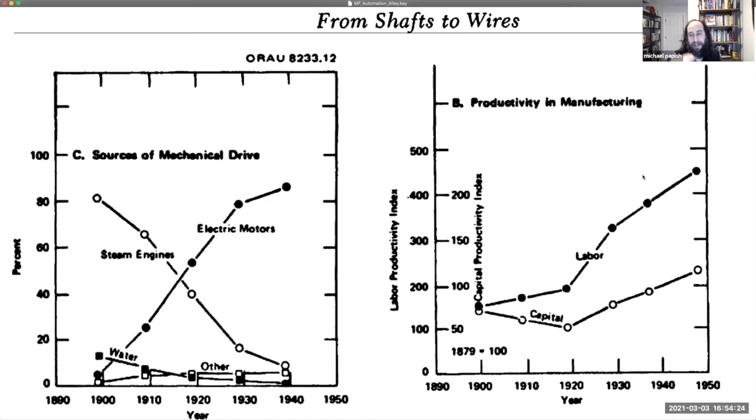It's kind of interesting to note that ultimately these gains in productivity, while the investments going on in factories are really happening with capital equipment, it's ultimately the human labor and productivity that generates the giant leaps and gains we see in the world. So we're changing the factory and the means of production, but with the goal of making the workers more productive and capable of building things faster and building more things.

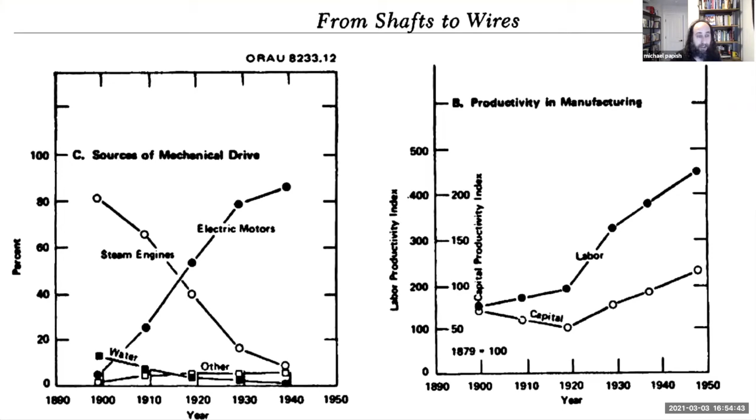So what is actually going on in these 40 years? It's really a process of having to learn how to think differently, of overcoming constraints that sometimes you forget even exist, to understand and unlock the full potential of a new technology.

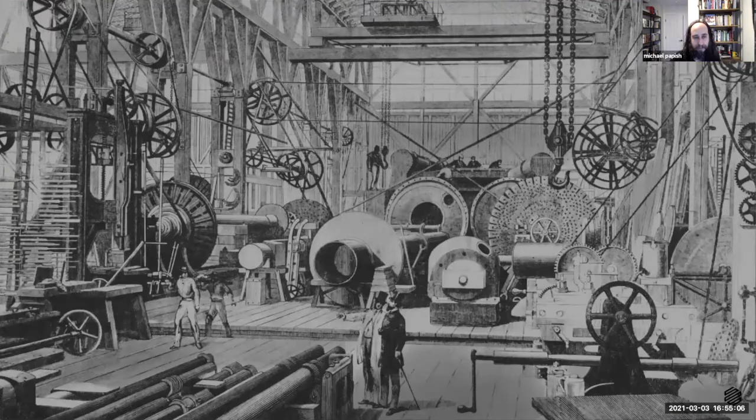So if you look at how a steam-powered factory might operate, and we have a picture of one right here, you'll see it's ultimately a pretty difficult place to work. Steam-powered factories were loud, noisy, dirty, really hard places to work.

Every single piece of equipment in the factory had to be attached to one of these long-running shafts that ran up and down the full length. What this meant was that you organized the factory not around what was best for the people and what they were trying to build, but around the power source.

Things were very manual in these factories. On the left, there's two guys carrying something around - kind of the modern equivalent of a forklift. In the front, we have these two guys in top hats. I like to think of this as kind of the CFO. Even back in the good old days, you still had a CFO walking around making sure this thing was generating profit and working well.

But really, this factory was highly inefficient. If you wanted to run one part of the factory, you had to run the whole thing. There's no way to separate the power source from the cells inside the factory, and really there's a lot of wasted energy.

So ultimately, as we imagine how to apply the lessons of the past to the world we live in today, we can find many parallels in the transition from steam-powered factories to electrical factories, and the ways people had to learn how to harness the technology differently. When we talk about this term Industry 4.0, or a revolution in how we make things, ultimately it's going to be about changing the culture of how people think about manufacturing and building in order to really reap the gains these revolutions promise us.

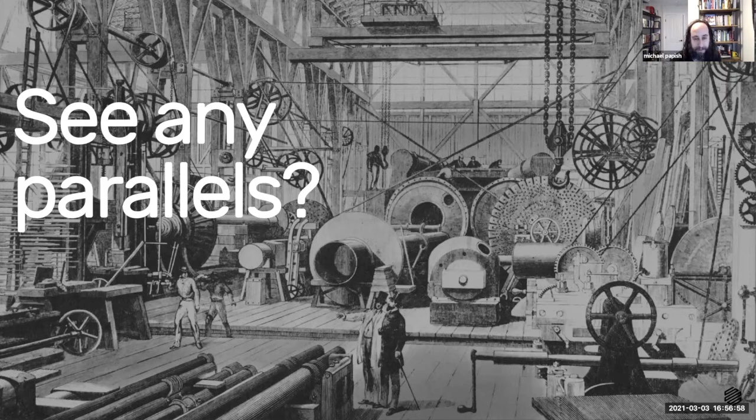So this may beg the question, if we're setting out to fundamentally change the way manufacturing works, why? Why does manufacturing need to transform? As a consumer today, I can go on Amazon and almost anything I can imagine, I can get shipped to me in 2 days.

For those of you in the audience who are manufacturers, I think you know much more about all the constraints and limitations. But even here, sometimes it's hard to reimagine the full potential of what we could do if only we could remove the constraints of traditional and conventional manufacturing to allow us to really build anything we imagine.

And so ultimately, we live in a very dynamic world. What I mean by that is, as a manufacturer nowadays, it's not necessarily the case that by just being able to produce a high volume of goods at a low price that you will win. In reality, there are many other things you have to be able to do to succeed as a manufacturer today. Now, before the pandemic, these were still the case.

After the pandemic, I think it's pretty starkly shown why many of our strategies for optimizing supply chains are not very resilient or adaptive to our modern and dynamic world. Certainly during the pandemic, we witnessed supply chain shocks.

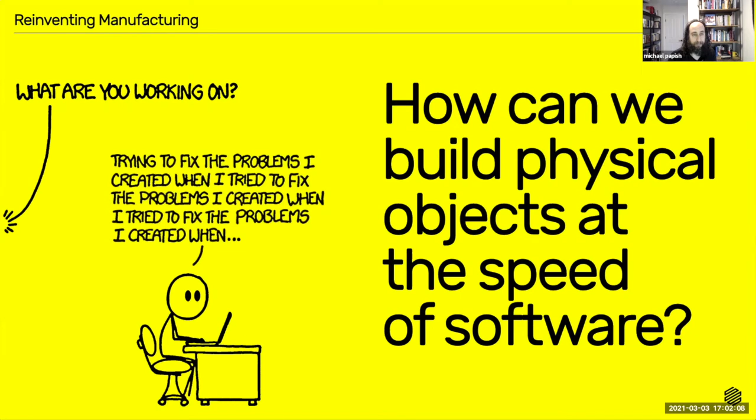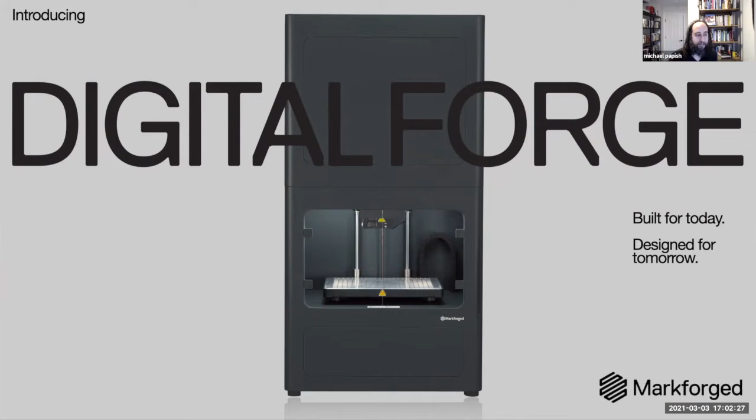So in order to do that, what do we actually make here at Markforged? Yes, we make 3D printers, but it's actually a lot more than that. Ultimately, we make the Digital Forge, and the Digital Forge is a platform. It's comprised of precise and reliable 3D printers, materials spanning the range from composites and reinforced carbon fiber and continuous fibers all the way to metal, and cloud software that connects it all together. Ultimately, it's the fact that this is a uniform and integrated platform that will scale over time with a single workflow that we believe best meets the needs of manufacturers.

Ultimately, we believe that both manufacturers and Markforged are on a journey to create better and better additive solutions. We think that by provisioning a platform that our customers invest in and begin to use, we can take that platform and scale its capability set over time, allowing us to bring new innovations and capabilities while supporting the journey of our customers as they adopt additive across their entire organization. So really it's the idea of offering a solution that scales over time that will allow us to meet the future needs of manufacturing.

So the Digital Forge is the name of our platform. We built it to work today and deliver real value, but we designed it to scale into the future and to meet your needs where you're going.

So what is it that we actually provide here at Markforged? We provide real and tangible ROI today so you can unleash the full potential of your employees. What we mean is our solution and platform can solve real applications today, earning back ROI and delivering real value immediately. It's not just for R&D or prototyping—you can place this into production and yield real results immediately.

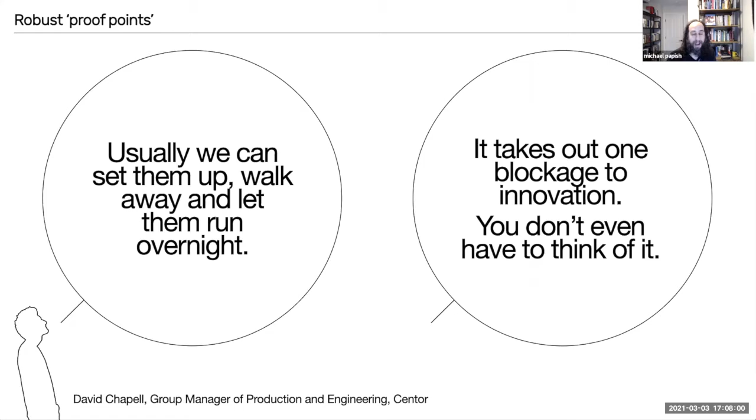When we think about being robust, it's this notion that you can set the system up, walk away, let it run overnight, and it prints exactly what you expect. You don't have to futz with it to tune it just right—we take care of all that so you can rely on this tool for industrial use cases. When we think about being simple, a lot of this is baked into the user experience.

Having one single optimized workflow across all the materials and printers that we provide, having the ability to access this anywhere in the world across all your facilities, and multiple users, just like the way that your company actually runs.

One of my favorite features is the simple 5-star print rating. When you complete a print, a dialog box pops up on the printer and asks how good was the print, 1 to 5 stars, just like giving a Yelp review. It's that easy to give us feedback, and that data comes back into the system. Because it's smart, we use that data to make the printers print better the next time.

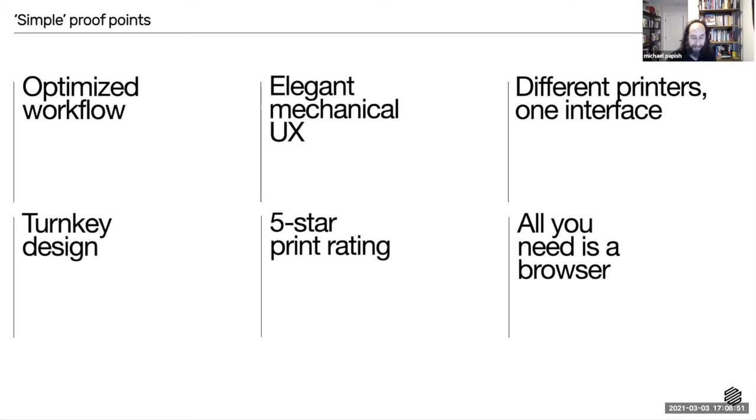There are also a bunch of other smart features built into the system. For example, our X7 printer has the ability to automatically calibrate itself. There are sensors on the printer that over time we will be using more and more to gather data in real time about the prints and then optimize and make it better, essentially closing the loop on manufacturing.

We have the ability to monitor your material usage in real time. There are APIs available if you need telemetry data. We provide live build monitoring so you can get actual pictures of your print being made.

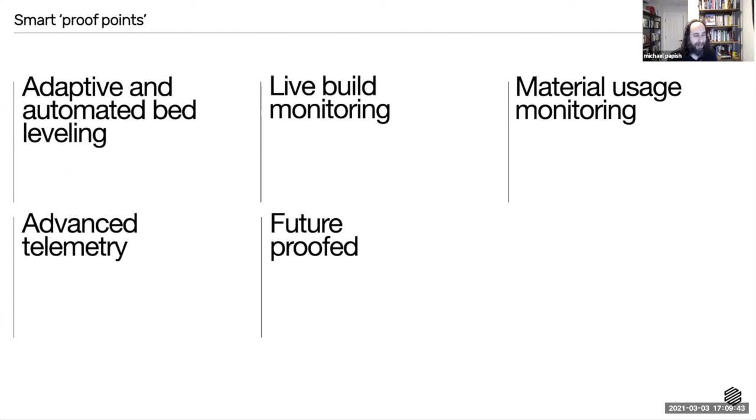And ultimately, the system is future-proofed. A lot of capital equipment depreciates in value over time. We always say that with Markforged, your printer is at its worst on the first day you install it, because the software that it comes with keeps making it better and better over time.

And then finally, it's empowering, and we hear this from our customers. These are some quotes from Caldwell Manufacturing. They're a window and door manufacturer in New York that is 130 years old. I actually just found out recently that all the windows on the Statue of Liberty were manufactured by Caldwell when it was first installed, and they still maintain those windows.

They use Markforged technology to really change the curve on manufacturing, and now solve problems that would have taken them weeks with traditional manufacturing technology in mere days using our printers. And this quote on the right from Eric, the CEO of Caldwell, says it has actually increased engagement and reduced turnover. It's actually part of their culture now.

And this, I think, is really powerful. A lot of times, new automated technology makes us fearful that it might displace jobs. But in reality, we see customers using our technology to make people more productive and more engaged at work, because they're solving more interesting problems and leaving the boring stuff to the printer so they don't have to deal with it as much.

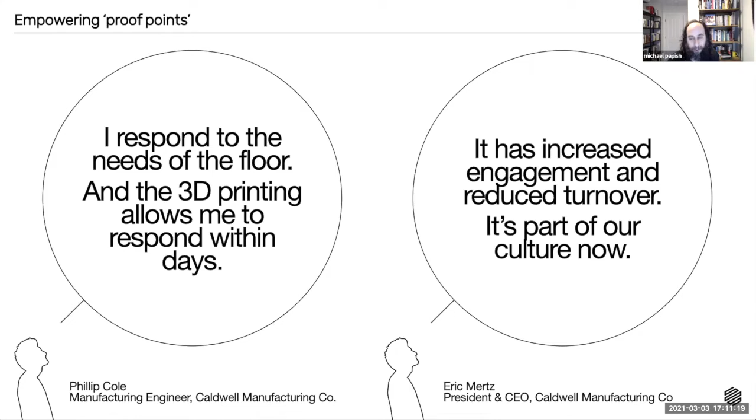And this is exactly what we want to hear, this idea that what we're actually doing isn't just selling printers. It's actually changing the culture of manufacturers, which is ultimately how we get to things like industrial revolution. So again, if we're looking at the pillars, robust, simple, smart, and empowering, this is the formula that we use to deliver success.

Now, we believe that the world of additive is going big places. So you may have seen recently some news from us. Our company will be going public over the next couple of months, and we're really gearing up for the next phase of our growth. The thesis behind this is that additive technology is moving away from R&D and prototyping, really crossing the chasm into real production use cases.

And these are the use cases that we are actually delivering today here at Markforged. It's not just about the future. We're solving real tangible problems today, and we see a widening set of opportunity going forward.

Looking out into the future, this industry of additive manufacturing has actually grown quite a bit over the last 10 years, starting at around $2 billion a year in 2012, growing to an expected nearly $18 billion in 2021. A substantially higher growth rate is expected over the next decade, bringing this industry over $100 billion by 2029.

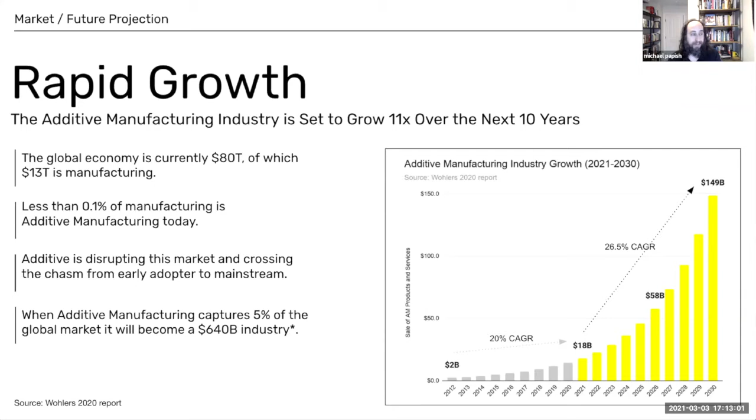And it's not surprising. Manufacturing is a giant global industry. Today, the entire global economy is about $80 trillion, and manufacturing is $13 trillion of that. Today, less than 0.1% of manufacturing is powered by additive technology. We believe that over time, as we're able to scale the capability sets, more and more manufacturing can be done via additive, and that will really usher in these changes that we're talking about.

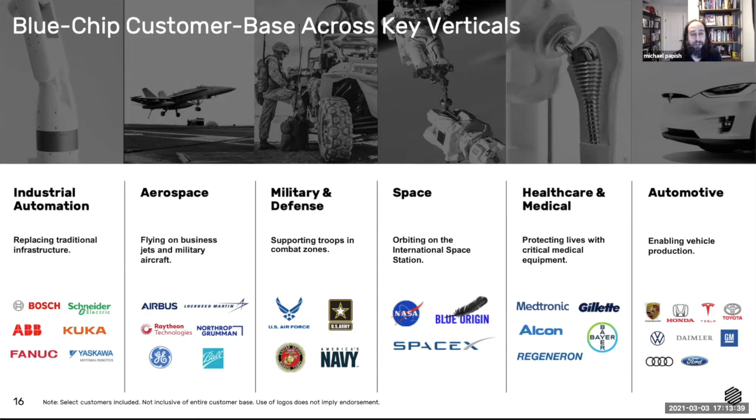Today here at Markforged, we're delivering real value across all the leading edge industries that are taking humanity to our next level, from industrial automation, changing the pace of factories, aerospace and space exploration, military and defense, healthcare and automotive. At Markforged, we're really lucky to be working with the top customers in each of these segments, delivering game-changing technology that's going to allow us and the world around us to really change each of these industry verticals over the next several years.

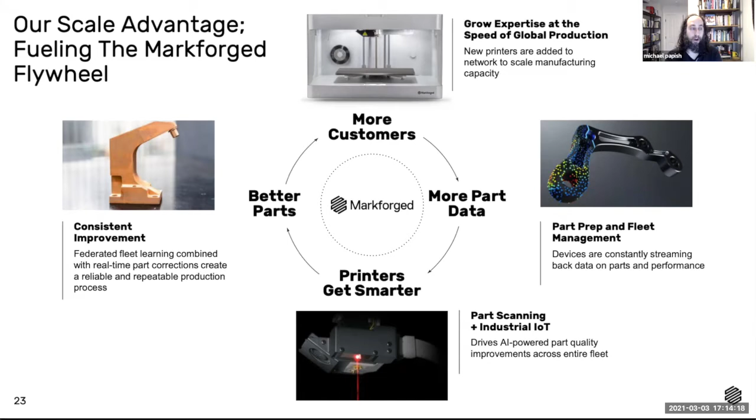The way this is done for Markforged is that the more our printers are used, the smarter the system gets and the better the parts become. It's this really great flywheel. As we learn more about how different parts work on the printer, using the sensors built in that are able to scan these parts, we can deliver via federated fleet learning consistent improvements via over-the-air software that continually make the system better and therefore create more interest in printing more parts, which drives this wheel around.

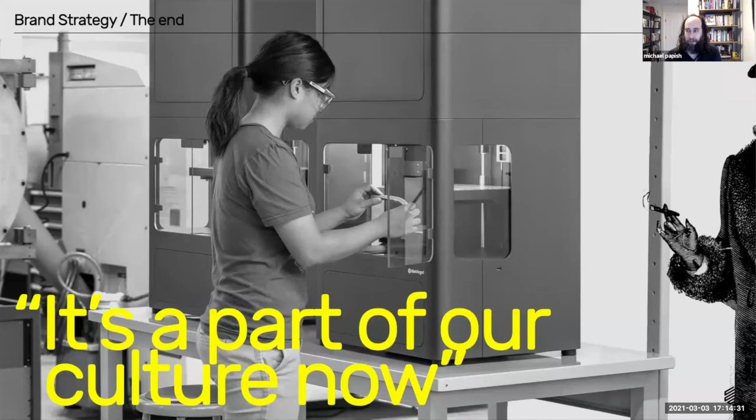Ultimately, what we want to hear, it's a part of our culture now. And here is the CFO. He has returned from the beginning part of the presentation. He's still looking over people's shoulders, but he's pretty happy at how these printers are working. They're delivering some really great value. He sees lots of opportunities. So he's exited stage right, and we can get back to the actual work of running manufacturing operations.

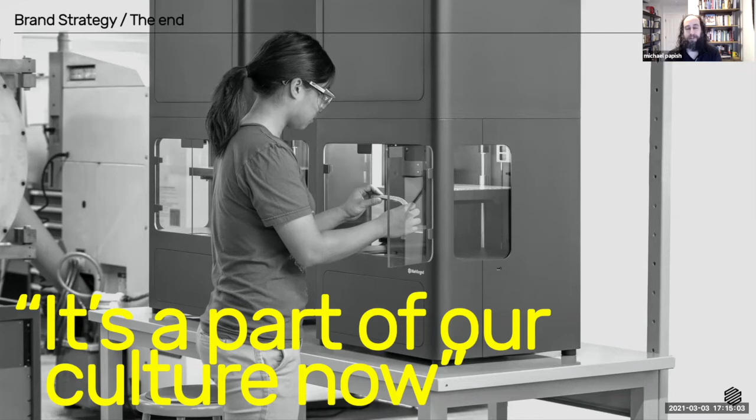Good morning, and thank you, Michael Papish, for kicking off today's Tech Takeover session with the story of us. At Markforged, we are reinventing manufacturing today so that our customers can build anything they imagine tomorrow. This is founded upon the belief that if we can bring the power of agile connected software to the world of physical manufacturing, we can create one of those productivity leaps that really truly ushers in a new age of manufacturing.

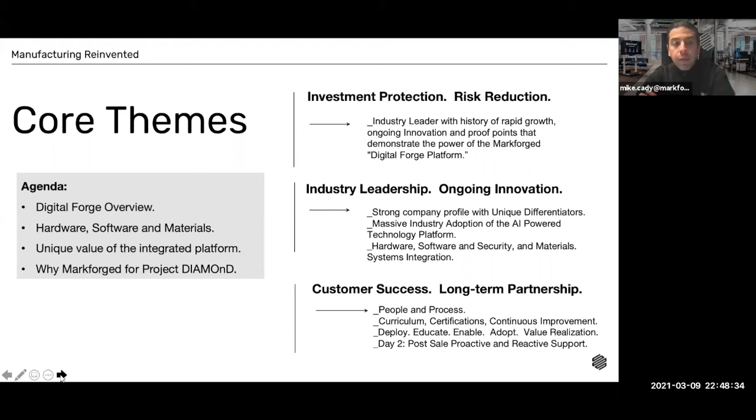Over the next 30 minutes, we're going to dive into some of the details of what we call the digital forge. We'll spend time reviewing our hardware, materials, and software portfolio, highlighting the unique value our integrated platform delivers to define why Markforged is a great fit for Project DIAMOnD.

So the Markforged industrial 3D printing platform is purpose-built to be smart, robust, simple, and empowering. We do this by bringing the power of agile software engineering to the world of industrial manufacturing. We call this the digital forge.

In 2013, we invented the digital forge, which was the world's first and only high-strength, low-cost, smart additive platform. Today, we have the world's largest and most secure fleet of connected industrial 3D printers, with about 12,000 manufacturing customers printing more than 10 million parts. We are collecting massive amounts of data that will be used to power the next generation of digital factories.

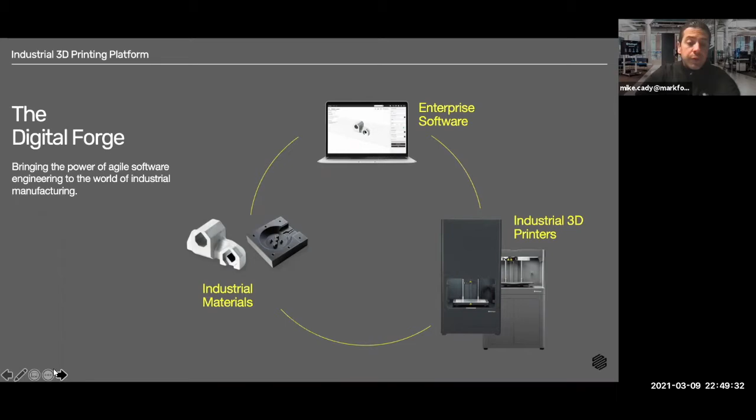At Markforged, we design intelligent 3D printing systems that continuously improve and transform the way you manufacture. So with software at the core, the digital forge provides a single user experience across the entire Markforged technology stack. We offer a full range of printers in the portfolio, from plastics to composites to metal. And we have purpose-built materials that are engineered to deliver superior strength, accuracy, and surface finish.

All of these components are built and designed from the ground up to deliver a wide range of functionality in a reliable manner. By controlling all of these variables associated with the 3D print, we, Markforged, own the entire value chain and can ensure successful outcomes for our customers.

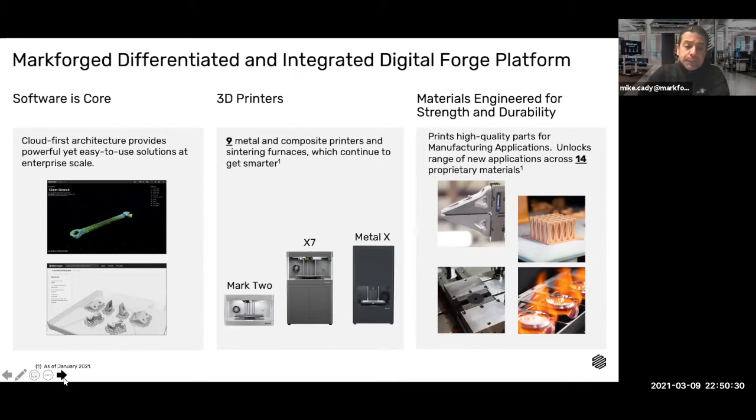So in the context of Project DIAMOnD, in less than 60 days, we implemented the DIAMOnD Network, supporting approximately 300 businesses in Oakland and Macomb counties that enables an agile print-on-demand infrastructure for PPE in emergency response situations. In addition, this network will serve as the foundation to support future diversification via a digital e-commerce marketplace for B2B commercialization.

The Digital Forge itself offers a simple, smart, scalable additive manufacturing platform built and designed on this secure cloud-connected architecture. So the Digital Forge enables machine learning that makes the platform better with each part it prints.

The Digital Forge printer functionality and capability is constantly enhanced via ongoing over-the-air updates, which provide software feature releases delivered through the Markforged cloud architecture. There's no network, no compute, no storage required, and little or no IT operational burden to implement and support this application. This provides organizations with a true borderless experience for global connectivity and collaboration, as well as maximum visibility within your organization. It becomes very easy to manage printers across multiple geographies.

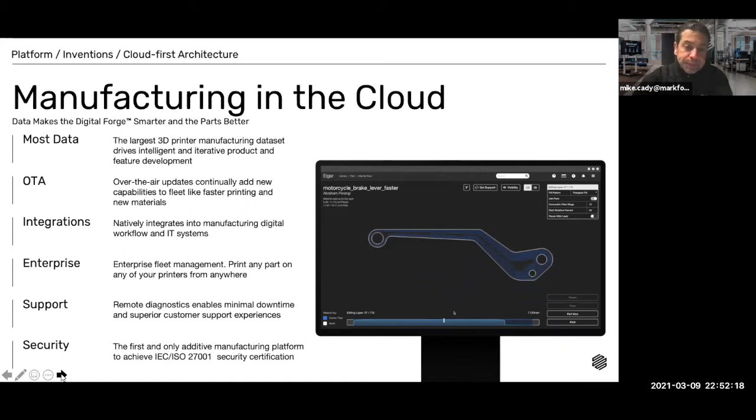Markforged is transforming manufacturing today, leveraging a broad portfolio of 3D plastic, composite, and metal printers capable of producing parts tough enough for the factory floor. The DIAMOnD Network has deployed and adopted all of the products that you see here on the screen.

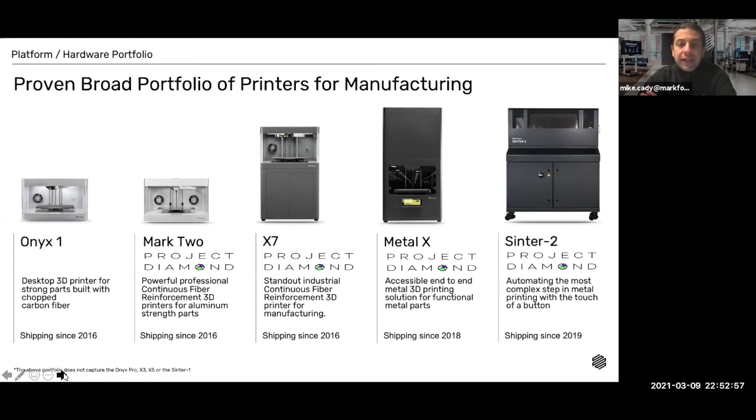Everything from our Professional Series Mark Two continuous fiber desktop product to the Industrial Composite X7 to our Metal X Sinter 2 print farms. In addition to the hardware portfolio, the Digital Forge platform offers a wide range of materials, unlocking a broad set of applications for our customers.

Markforged is the only company who offers a portfolio that spans plastics to composites to metal via a single user experience across the entire portfolio. And that enables our customer base to scale quickly and reduce any ongoing operational burden associated with this type of technology.

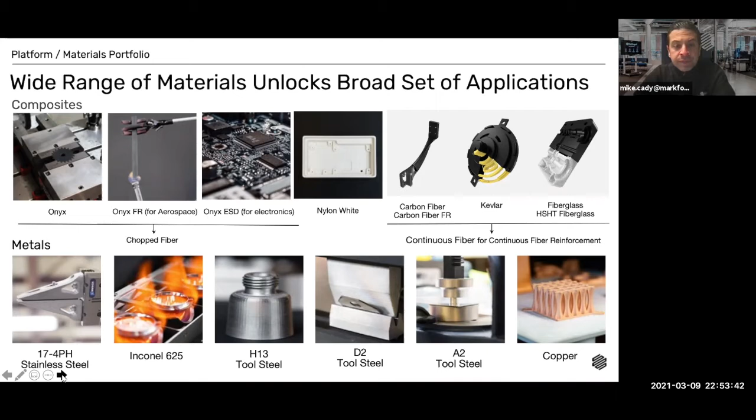Cloud computing is only possible when we prioritize the security of our data. So we believe that every product and engineering decision that we make at Markforged has a security component to it, and our customers and their data are at the center of all of these decisions. So a couple things to note.

Markforged offers the most secure additive platform in the world. We believe we're the only platform with ISO 27001 certification, across organizational security, customer data, software and supplier relationships. And that's further underscored by the fact that Markforged is the only additive manufacturing company in the DoD manufacturing consortium. Frankly, we're committed to being extremely transparent about our security practices, and we're continuously improving our security program to ensure we're exceeding security standards of our customers.

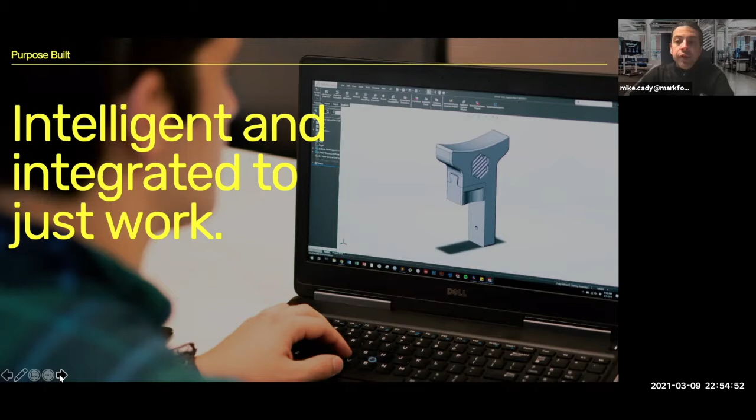In sum, the Digital Forge is an extremely scalable, easy to use, purpose-built system that works securely and reliably. Okay, so now that you have a good understanding of the Digital Forge, let's talk software.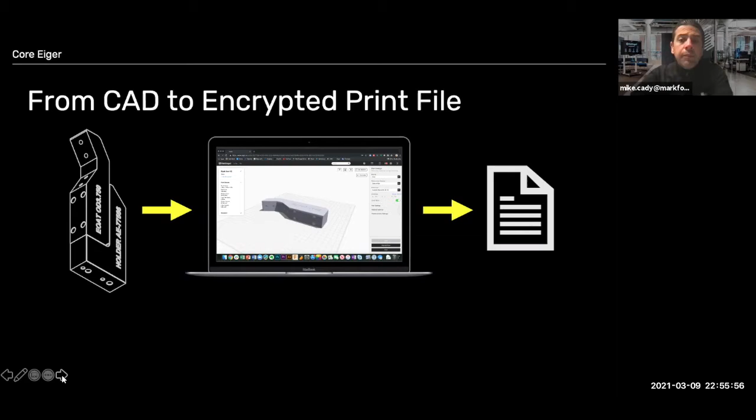Eiger also provides a streamlined way to go from design file to perfect part with our best-in-class Markforged slicer. It's real simple: you import the STL, you set your print parameters, save your part, and your part saves as a MFP file that can only be decrypted by the endpoints in our printer portfolio.

To expand a little bit on Eiger, or Core Eiger as we call it, it's a cloud-based application that runs through a Google Chrome web browser. All the technology from Markforged uses Eiger, which means it's the same experience whether you're leveraging our plastic, composite, or metal products. It's one service and support model for your entire fleet, and it's one hand to shake.

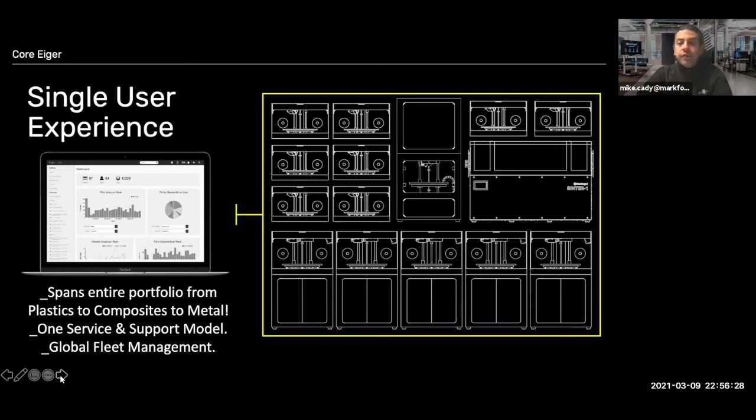This system has been engineered and designed to be simple, scalable, and easy to use. The cloud solution architecture is built on a best-in-class security program, as we mentioned. The Digital Forge is an end-to-end solution for deploying digital factories in any industry. One platform, one experience, one solution, one hand to shake.

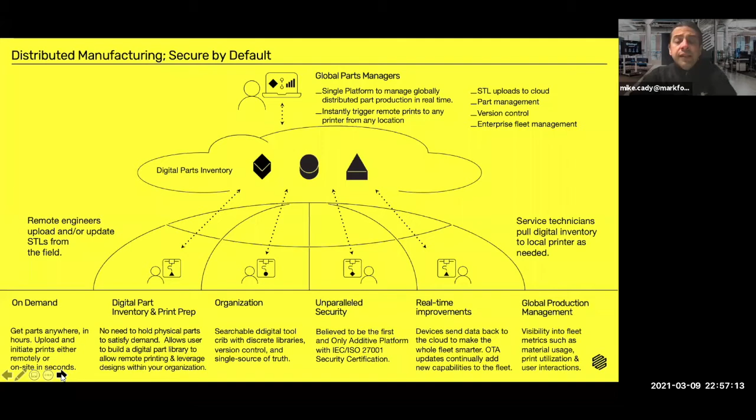We have the ability to trigger remote prints to any printer from any location in the Eiger org. We can manage the entire fleet via a single pane of glass. You have access to a single source of truth, digital inventory, and print on demand capabilities. And lastly, seamless deployment of new features and capabilities via OTA, or over-the-air, updates that we mentioned a few moments ago.

A couple areas of additional functionality to call out. These are things our customers really dig about the Core Eiger platform. Prior to printing, Eiger tells you what your cost and lead time is, and the volume and weight in advance of the print. It also allows you to establish preset builds.

So you're not limited to printing the same part. You can print any combination of parts, assuming the build materials and layer heights are the same. You can also save these builds for future reference. We have a lot of customers with multi-part assemblies that they'll save as a build, so you can call those up on demand and print them on demand.

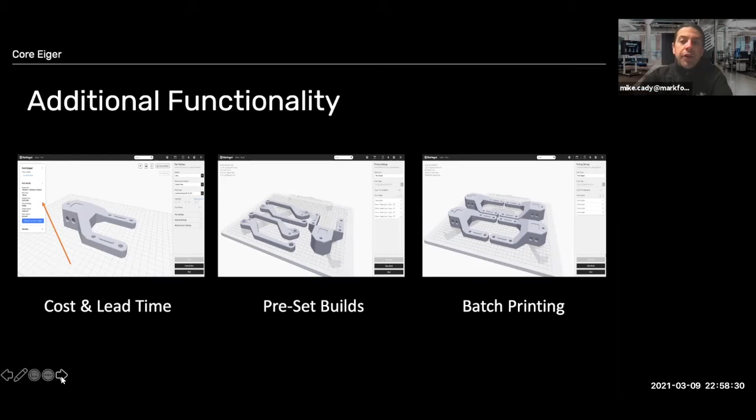And lastly, batch printing. You have the option to do kind of a multi-up print. In this example, you see 4 parts, 4 of the same parts at once. You'll get a summarized version of the build time, cost, and material usage as you make changes to that batch print. This allows the user to optimize based on time and cost metrics if needed.

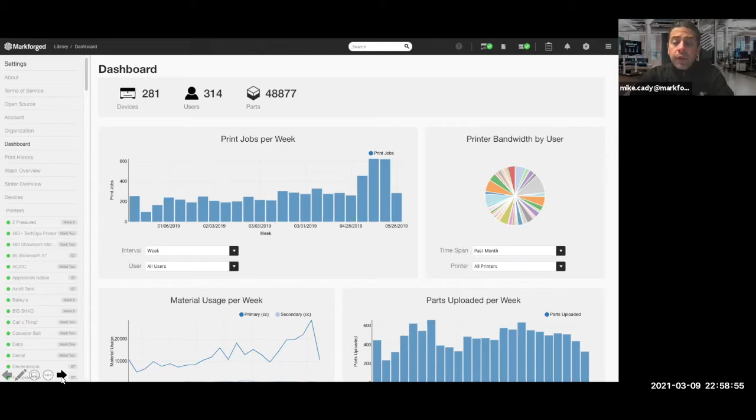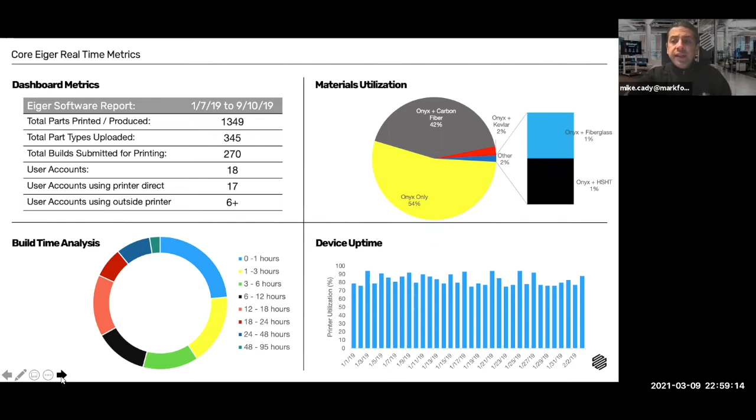With Core Eiger asset monitoring via our integrated dashboard with KPIs, you get global connectivity and full visibility into your Eiger organization, enabling you to easily track usage, utilization, and more from a single platform. Specifically, key real-time metrics are tracked and can be exported to a CSV file, such as devices, users and prints, material utilization, build time analytics, device utilization, and uptime.

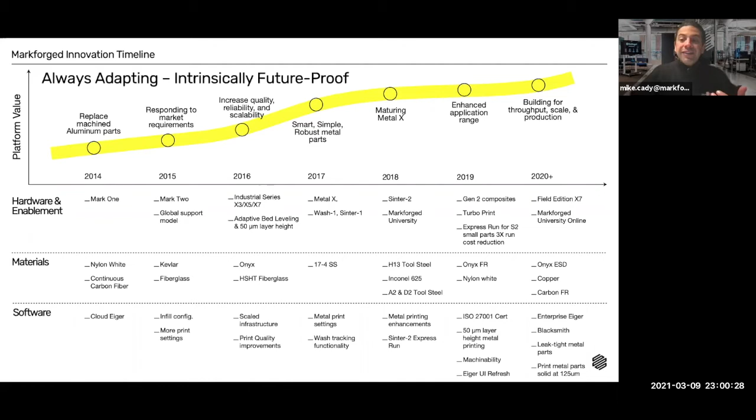The Digital Forge is proud of its long history of innovation centered around market-driven technical development. The core system itself continues to improve over time at no additional cost to the customer. The Digital Forge is always adapting as it continues to learn and grow, delivering more value to our customer base across hardware, materials, and software. Because we're always adapting, we're intrinsically future-proofing our customers' investments in Markforged. Over the years, there are many proof points reinforcing that when customers invest in the Digital Forge platform, the solution is the worst it will ever be in your environment. The system keeps learning and getting smarter over time.

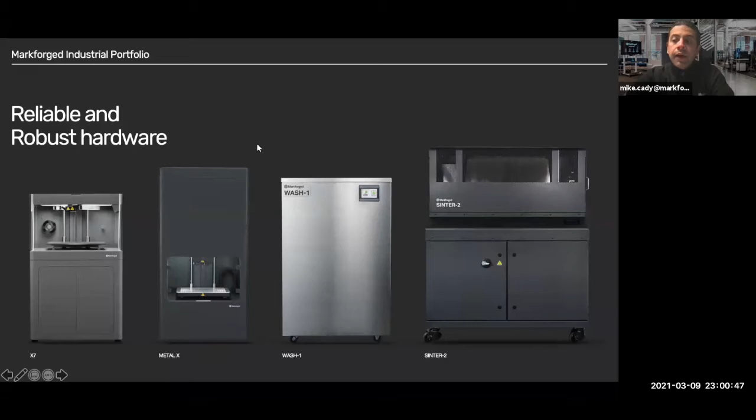Now that you have a baseline understanding of our software, let's talk about hardware. The Markforged industrial portfolio is made up of extremely reliable and robust hardware. We've instrumented the industrial composite platform with a full sensor suite and a 1 micron laser micrometer, which is the driving force behind the industry-leading automation and quality of the platform.

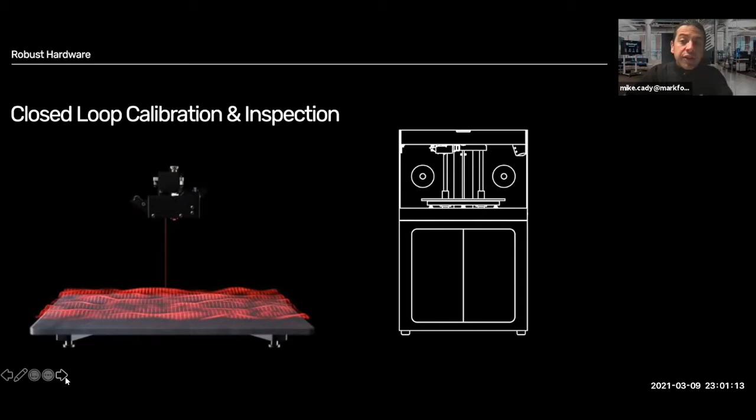What sets the industrial composite platform apart from others is the level of automation incorporated into this product. This automation provides a seamless and reliable customer experience and exceptional accuracy. The platform can routinely print parts with an accuracy of plus or minus 50 microns. That 1 micron laser micrometer on the print head serves a variety of functions, such as adaptive bed leveling, pre-print calibration, and in-process inspection.

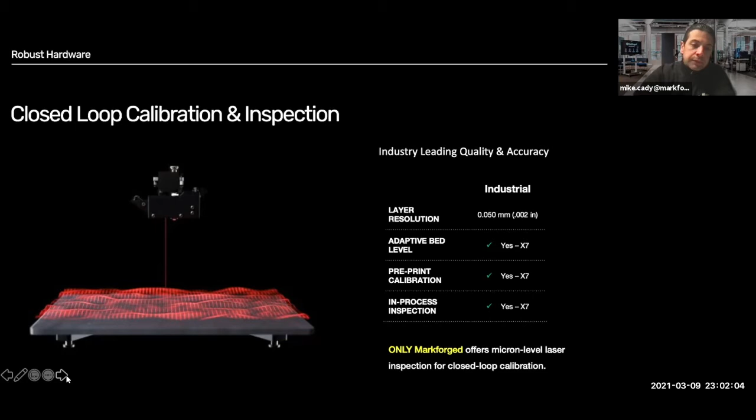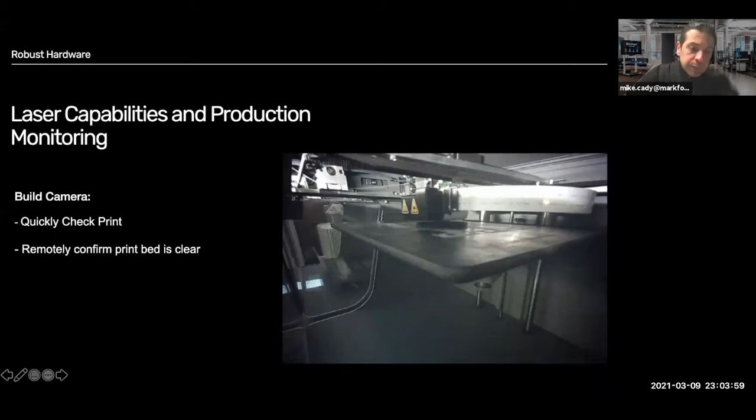These laser and production monitoring capabilities increase overall print reliability and uptime for our customers. The industrial composite flagship product, the Markforged X7, also offers an onboard camera that lets users remotely check in on their prints and even remotely kick off a print. The robust hardware offering also provides best-in-class surface finish with extremely smooth surface quality at high resolutions, setting the industrial composite platform apart from others in the industry.

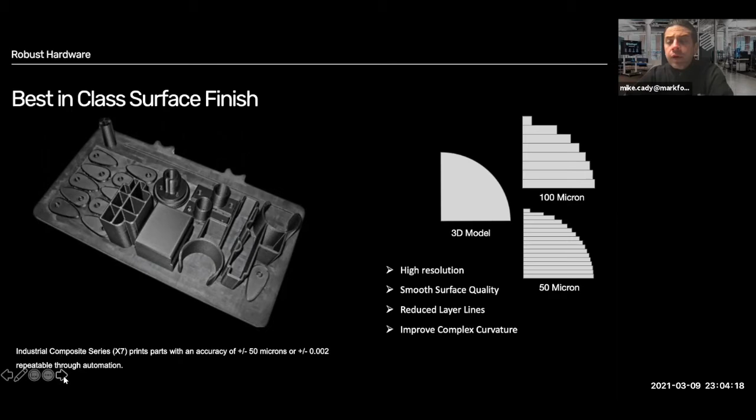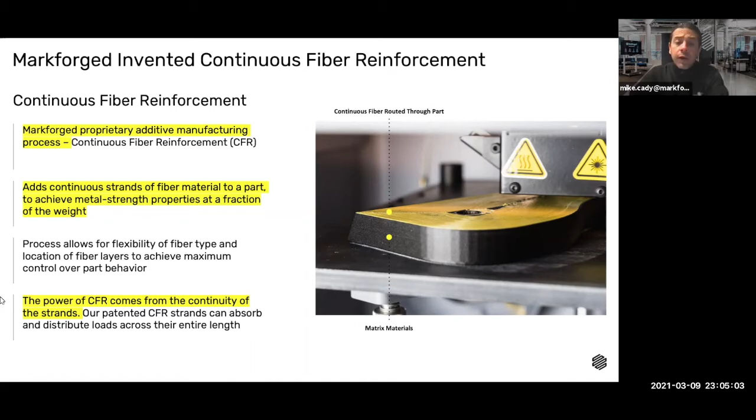With this foundational understanding of the world's first cloud-first software solution for additive manufacturing, and the robust capabilities of our industrial hardware platform, let's build on that knowledge and introduce the world's first continuous fiber reinforcement printing solution. Continuous fiber reinforcement is a unique and patented process from Markforged that unlocks massive potential on the manufacturing floor for our customers. Markforged invented this process, delivering unmatched strength in our industry.

The matrix material we use is called Onyx. Onyx was developed by Markforged, and by definition it's a composite in itself, consisting of a mixture of nylon and chopped short strands of carbon fiber. Interestingly, the chopped carbon fiber was not added for strength, but for stability and printability. The short strand carbon fiber helps prevent drastic changes as the material is heated and cooled, resulting in very beautiful and accurate parts. Onyx by itself is extremely strong — 20% stronger than ABS and about 40% stiffer.

The dramatic increase in strength, though, comes from the addition of continuous fibers to the parts. Markforged technology offers the unique ability to integrate continuous strands of carbon fiber, Kevlar, fiberglass, and high strength, high temperature fiberglass into your parts. Each of these fibers was selected and engineered to let users tackle a wide variety of problems. At the end of the day, CFR is 11 times stronger than Onyx and about 25 times stronger than ABS plastic, and customers are replacing legacy plastic and traditionally manufactured steel and aluminum parts with this Markforged proprietary continuous fiber reinforced composites capability.

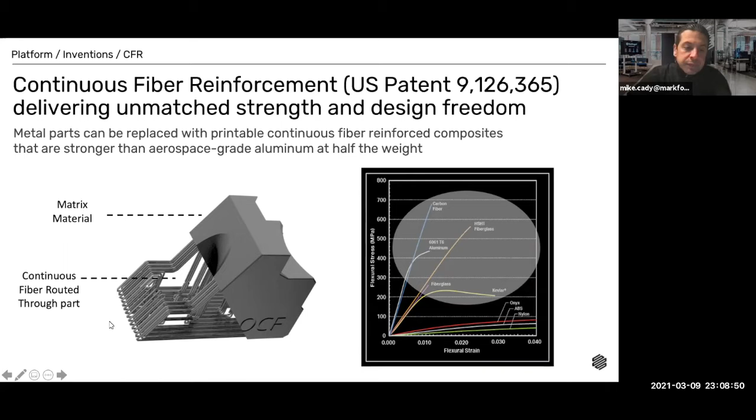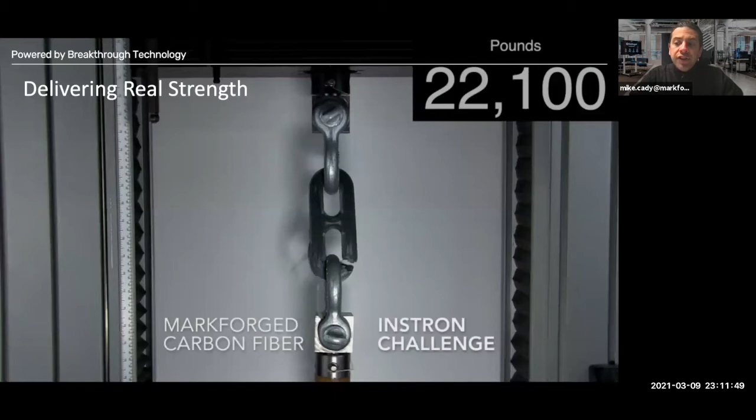So here's an example of real world strength that can be attained through 3D printing continuous fiber parts. This is a chain link that was printed by the Olin College of Engineering with continuous carbon fiber strands on a Markforged printer, and it eventually broke at 22,000 pounds.

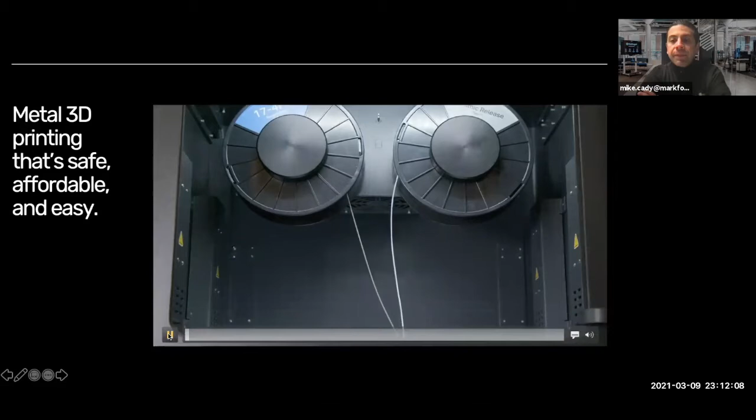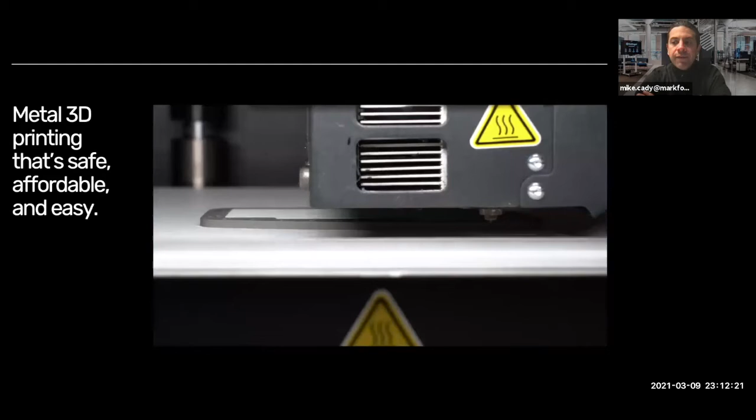Okay, so now that we've got an understanding of the Markforged composite capabilities, let's shift gears a little bit, no pun intended, and talk metal. Markforged has iterated and optimized the printing of a suspended solid filament very accurately for the last 6 years. The robust system utilized on the X7 was partially leveraged in the design and development of the Metal X system. So the printer process is a simple extrusion style process, or FDM process, which builds parts layer by layer.

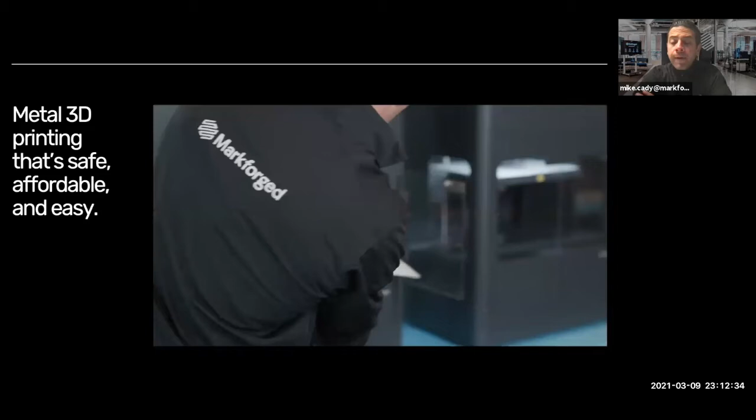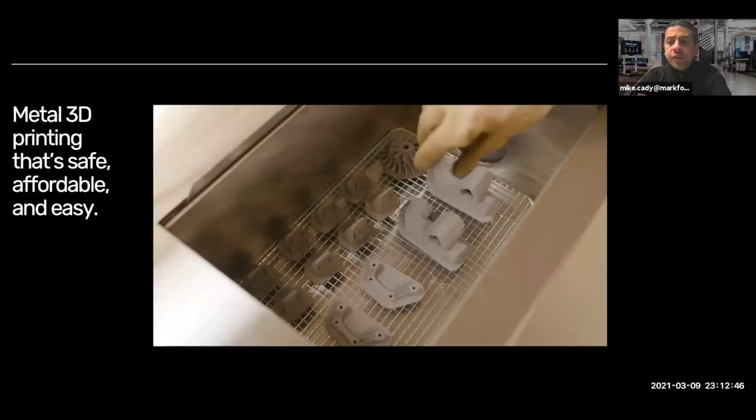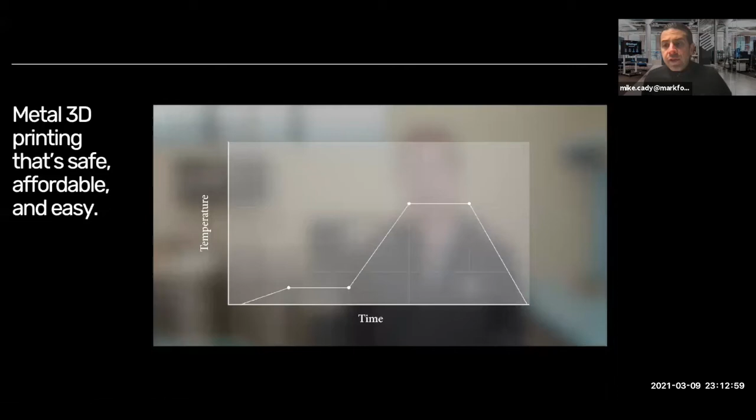The Markforged metal system offers safe and accessible metal printing at 1/10 the cost of traditional metal printing technologies. There's no loose metal powders. As you can see, no respirators required, no purpose-built room needed, minimal PPE, and minimal facility requirements. The process has very easy self-service material changeover, and it's frankly just a very simple metal printing process.

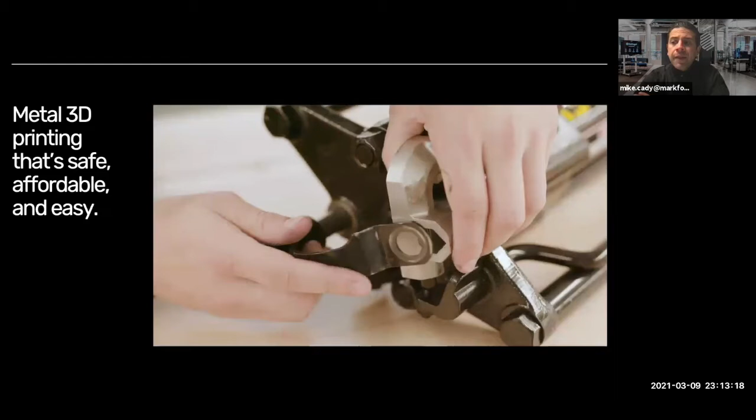In terms of accuracy, it's a near net shape process. The printer can print down to 50 micron resolution for very detailed parts. In general, for small parts, the accuracy is about 125 microns. The good news is that the parts printed on the Metal X can be post-processed just like a traditional cast part. You can heat treat them, you can weld them, you can machine them, you can tap them. So if you need a higher level of accuracy, you can achieve this through a post-machining step.

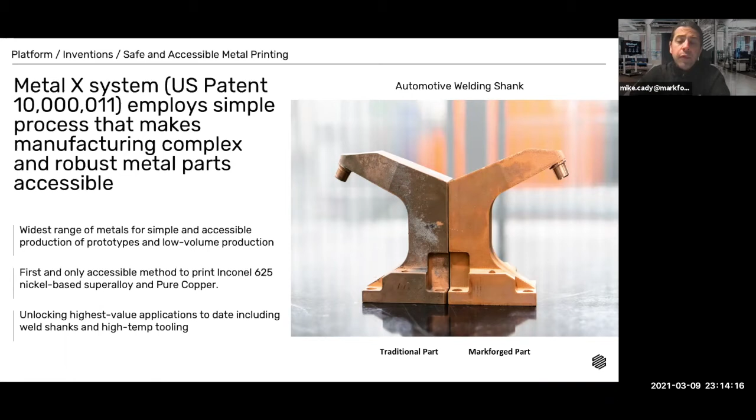The Metal X system employs, as mentioned, a very simple process that makes manufacturing complex and robust metal parts very simple and accessible. With over 170 patents and pending patents, Markforged offers a unique solution whereby scale is our advantage, right? The more customers we have, the more information and part data we collect. The software gets smarter. We take that intelligence, we bring it back to our customer base, and as an outcome, the system is constantly improving. We're getting better parts, and you're getting more out of your investment.

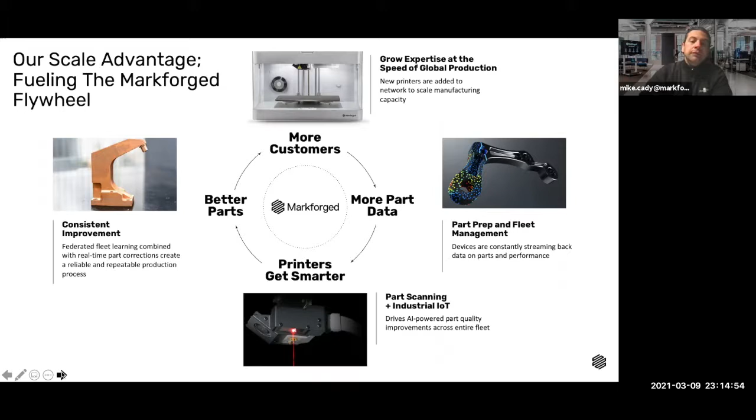This scale has resulted in a global fleet of connected customers who are taking advantage of the Digital Forge platform to help shape and transform their manufacturing processes as they continue on their additive journey.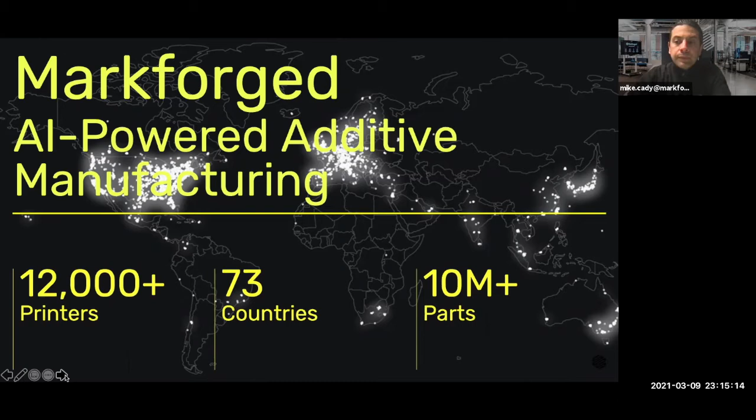Okay, so busy page, but you may ask, why Markforged? So here's 13 good reasons why customers invest in an additive manufacturing partnership with Markforged.

At the end of the day, Markforged breaks down the barriers to adoption of these transformational manufacturing processes with a couple key things, right? Production grade systems and materials at disruptive pricing levels that drastically reduce shop labor and overhead. The printers have built-in machine calibration and inspection, producing reliable and repeatable parts to satisfy the most stringent requirements. We have durable composites, revolutionary continuous fibers, and a wide portfolio of metals.

The overarching software platform is designed to automate process, remove steep learning curves, and is frankly safe and easy to operate in a wide range of environments.

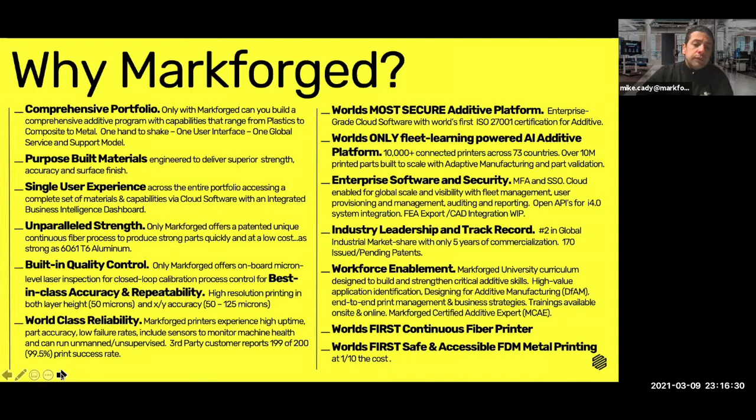Continuing, why Markforged? We like to talk about partnering with Markforged. So look, we believe that partnerships go well beyond the technology. It's the people and process that we wrap around the technology that drives transformation and overall success for our customers.

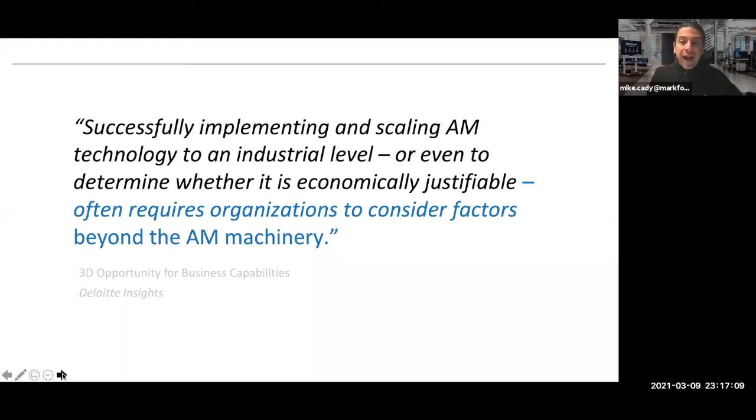I think that point, it's a key point, and it's underscored very well here by Deloitte, where they say, successfully implementing and scaling AM technology to an industrial level requires organizations to look well beyond the machinery or the technology, right? At Markforged, we are a market-driven enterprise technology and engagement organization.

And again, that spans from people, process, and technology. So in the context of people, from strategic partnerships to our global network to Markforged University, we've got the people in our ecosystem behind the solution to help you alongside your additive journey.

From a process perspective, Markforged offers a broad range of consulting services, education and enablement, as well as integration and automation to truly optimize our customers' investments in additive.

And last but not least, the technology. A very comprehensive and secure industry-leading manufacturing platform that was designed for scale. It's an outcome of this partnership approach and the why Markforged items we previously reviewed that connected Markforged and Automation Alley to go on this journey together.

So what are we doing in the context of Project DIAMOnD to help evangelize the program and amplify its value through the digital production network that's been deployed? Currently, local government has the ability to issue orders for emergency PPE production to the manufacturers in the network who are plugged in. These manufacturers can also take advantage of this advanced technology to drive transformation in their business, whether it's securing a competitive edge, driving costs down, improving turnaround times, or even improving manufacturing and life cycle efficiency in their existing processes.

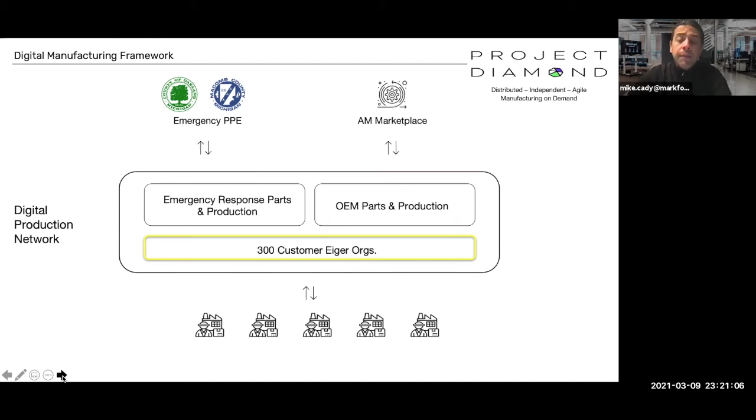Moving forward, efforts are being invested to help further monetize the network to benefit the grantees of the program, with greater sights on the network as an additive manufacturing e-commerce marketplace. At the end of the day, it's an opportunity to help build a new type of production network and supply chain to further strengthen manufacturing in the US, and specifically here in the state of Michigan.

To execute on this production network vision, a customer success program is critical path to driving adoption, utilization, and value realization necessary to advance and optimize the network's preparedness for the future marketplace.

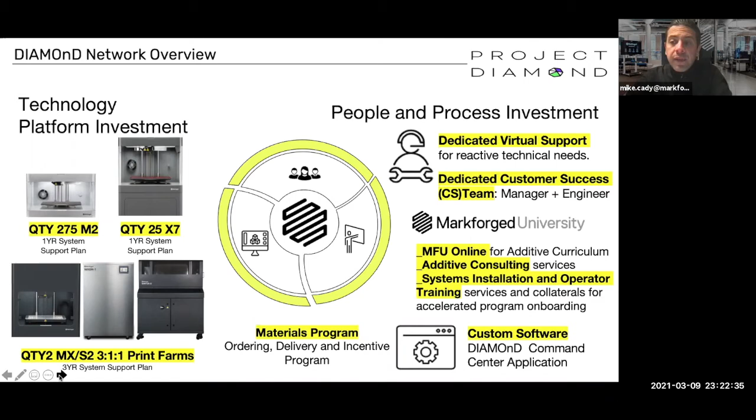So the view that you see here represents how important the people and process component of DIAMOnD really is. It's a core requirement and business driver behind the overall success of the program. As you can see, there's the technology investment on the left side of the screen. I would argue that the investment made in people and process to deploy the technology and to help drive education, understanding, adoption, utilization through some of the programs you see here on the right, as well as to support the network - while the technology is unique in of itself, the people and process side of the house is really what drives enablement and unlocks value for the network.

I'll build this out. So Markforged, in partnership with Automation Alley, we created a program that would facilitate this journey to additive maturity for the constituents or the grantees in the network. We intentionally planned tactics that would help DIAMOnD grantees prepare for the implementation of an advanced technology like this, which was frankly new to many of their businesses. We did that through proactive and self-service onboarding materials, such as quick start guides, unboxing videos, and webinars. As we started fulfillment of the product, we hosted open office hours, one-on-one meetings with grantees, provided training via Markforged University, and have consistently engaged with grantees and the Automation Alley team to provide ongoing support and information during lunch and learns and ongoing meetings with the stakeholders of the program.

Arguably, in my opinion, the most important part of this journey is optimization. Experience with our customers shows us that fully mature organizations hit value realization through expanded application identification, strategic implementations, and building a manufacturing culture around additive. This is the phase that we're intently focused on, or have been focused on since day one, but are really starting to execute now. And the program in of itself offers dedicated local and virtual support.

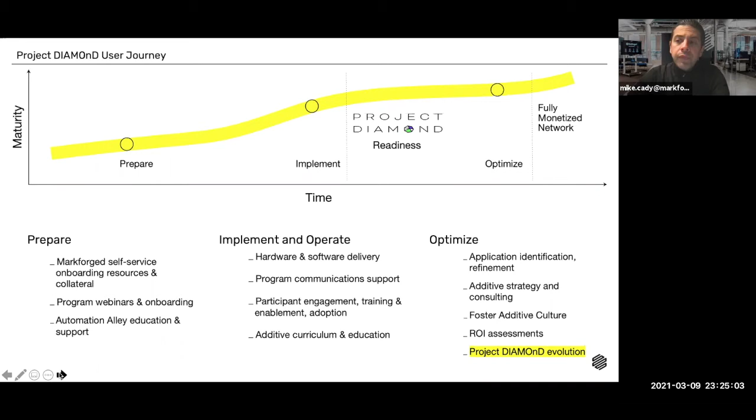Okay, so this is an eye chart, but I went back and thought, man, what are all the things that we put together to drive success? And they're represented here. Look, the data and metrics that we have access to right now, and early indicators, are quickly demonstrating not only the value of the Digital Forge platform, but our ability to quickly and easily scale an implementation of this size. But more importantly, selecting a strategic partner that can deliver on the vision with a well laid out people and process execution plan around the technology investment.

So the DIAMOnD network - what's unique here is the DIAMOnD network didn't have the added benefit of what we would call a routine pre-sales campaign that we're normally engaged in, whereby a lot of knowledge, education, and learning occur, such as application fit, business value, opportunities for monetization, et cetera, which are all usually covered in partnership together over a 3 to 6 to 9 to 12 month pre-sales campaign.

In addition, many of the community members that are part of this program weren't sure exactly how they were going to adopt additive and how it would work within their business. At Markforged, we understand the importance of knowledge, learning, onboarding, enablement, and education, not only pre-sales but during implementation, because it's critical to adoption and getting utilization out of the investment and deriving value realization and overall success of any additive engagement. So this understanding was the driver behind the scope of the customer success program we created and implemented for DIAMOnD.

Hello, everyone. My name is Zach Rosenzweig, and I am the customer success manager here at Markforged. I am joined today by a few of our Project DIAMOnD customers. They're going to tell us about their adoption of the technology, about their experience with 3D printing and Markforged, and most importantly for all of us to hear is the successes they've experienced using additive manufacturing in their business.

The first customer that I have the pleasure of being with is Steve Michon of Zero Tolerance CNC. He's going to go over his experience from past, present, and future when it comes to additive manufacturing and Markforged technology. I will pass it over to Steve now to give a quick intro about yourself and your company. Steve, thank you for joining me. Oh, thanks for having me.

Yeah, my name is Steve. I own Zero Tolerance. We build plastic injection molds for all kinds of applications, from consumer goods to medical to military. So we design, build in-house, and we have all the equipment to do it here. I know a lot of companies outsource things to China, which most people aren't doing much of right now, but it's still being done. So we pride ourselves on making things here in the U.S., and we like to have everything in-house and try to control it all, which is tough to do. So having a network of people that you know, that you can trust and work with, is key to our success here, especially in Michigan. That's about what we do. There's a lot of good things I see coming as far as products and services that we are dealing with and provide. So that rounds up our company.

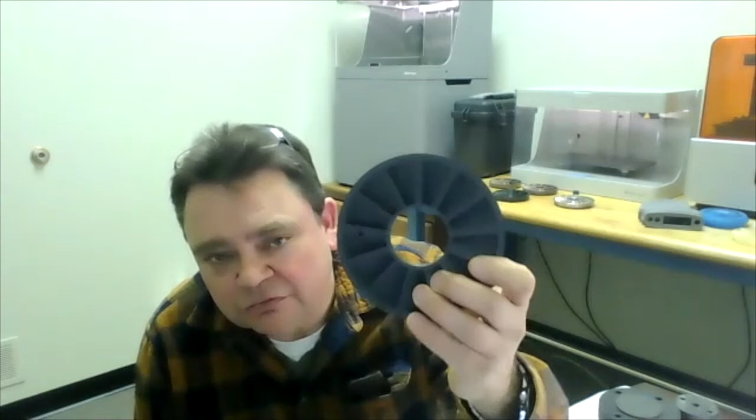So when we got the Markforged machines, we were very excited because this onyx material has a pretty terrific spec, and the fact that you could infill it with carbon fiber or glass fiber was very appealing, because obviously it can strengthen the part. On the Ventec side, we started building prototypes using the Markforged printers, and we can actually make parts now that we can run inside our device. These components are spinning at up to 6,000 RPM, we're running heated coolant through them at 200 degrees Fahrenheit, and we're able to make a design change, run it through the printer, have the parts in the morning, and test. It's just dramatically shortened up the prototyping time. If we want to make a tweak or change something, we can do multiple iterations in a week, where it used to take multiple weeks to do one iteration. So it's really been a godsend.

Well, that's fantastic, Jeremy. It sounds like the successes you've had already in just a few short months have been amazing. Let's talk about the two pieces of our platform behind you there, the X7 Industrial and the Mark Two Desktop. You had experience in 3D printing prior to joining Project DIAMOnD, but no experience yet with the Markforged platform. What can you tell me about the expectations or opinion you had prior to that? And what's your opinion about the platform today, including the software, the material selection, and the reinforcement capabilities?

Yeah, it's a great question, and I'll be candidly honest: when I heard that these machines were FDM machines, I was a little bit anxious about that, because my first experience with 3D printers, I can't remember the brand, it was a FlashForge Creator, which is a hobbyist desktop $1,000 machine, and that's FDM.

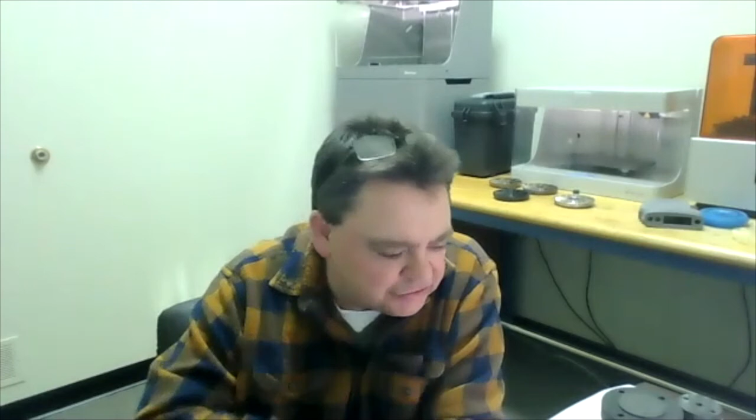On the Puritan side, we build automation and custom automation machines. We just received a contract a few days ago, and the customer has approved that the tooling, the end effector tooling, and the nesting in this assembly line will be made out of Onyx from a 3D printer rather than CNC milled aluminum block. We've assured them that if there's any compromise, we'll take care of it, but they're excited to see us use this modern technology approach to tooling.

When we do automation, the customer is often changing tooling, and that can be burdensome if we have to start cutting chips into a block of aluminum. Being able to quickly reprint a tooling or end effector because the customer's changing parts seems very attractive to our customers. So on the Puritan side, we're excited about implementing 3D printed rapid prototype parts for a production machine going into the production environment. We have high expectations for the durability and tensile strength of this material.

I'm really pushing my engineers to look at this. We've got these capabilities here in the building, and we're lucky to have them because I don't know if we could have afforded this caliber of machine on our own. I'm pushing our engineering team to make the most of them, and they're really engaging with the opportunity. Our two key engineers are working through the training, and the first month or so I was the conduit to the printer. Now I just tell them to go in the room, knock themselves out, get it working. I've really not been asked any questions - the engineers have come in, worked out how to use it, and they're walking out with parts. That's really encouraging, it's inspiring the engineers, and I think it's going to open a lot more opportunities for us in both companies, having this capability.